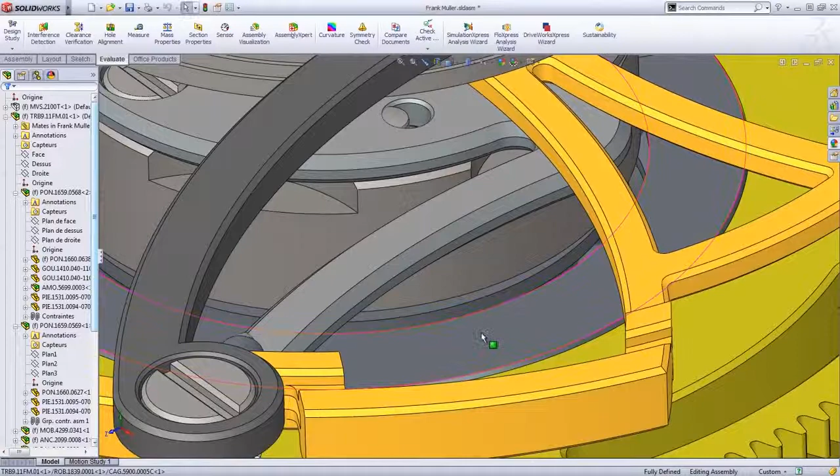From here, the isolate command can be used to focus on the misaligned parts and to then easily modify the problematic components directly within this assembly. The measure tool is also quite useful for checking your design or clarifying an issue. SolidWorks' robust set of tools makes correcting this dimension and repairing this part very easy, as we can rapidly realign the holes without ever leaving the assembly environment.

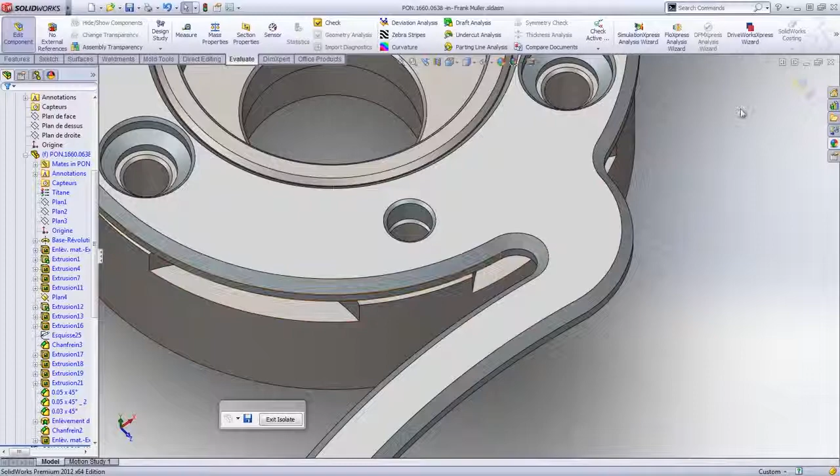Interference detection is another key capability useful towards achieving proper fit and function of a design. This analysis can be performed on the entire movement or only on this subset. With one of the fastest solvers in the industry, SolidWorks enables designers to quickly identify issues, even when all of the parts of this timepiece's mechanism are intricately related.

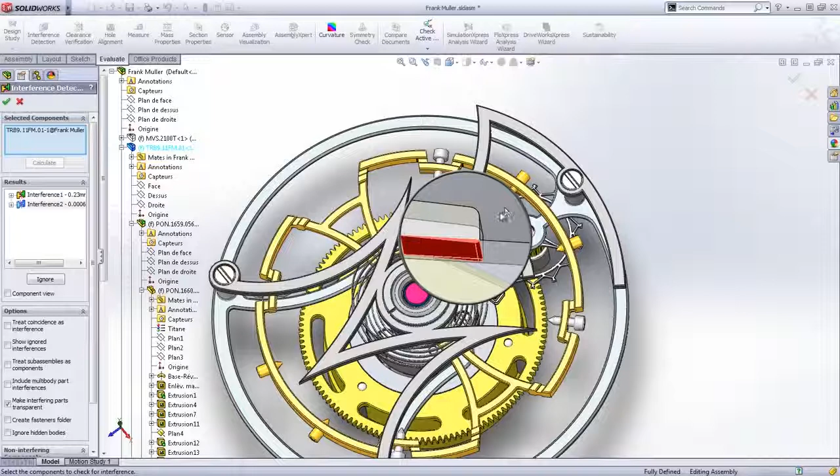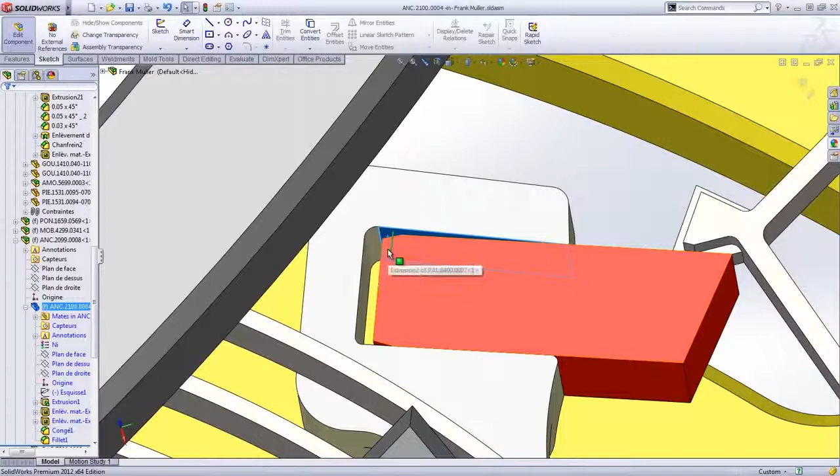When selected, the interfering volumes are highlighted on the screen, allowing you to see exactly where the problems lie. It is often a question of identifying and adjusting the offending parts. Armed with this knowledge, the first interference can be immediately fixed by editing the part in the context of the assembly and using SolidWorks' Instant 3D to modify the geometry. Pulling the handle will literally extend or shrink this feature on the fly.

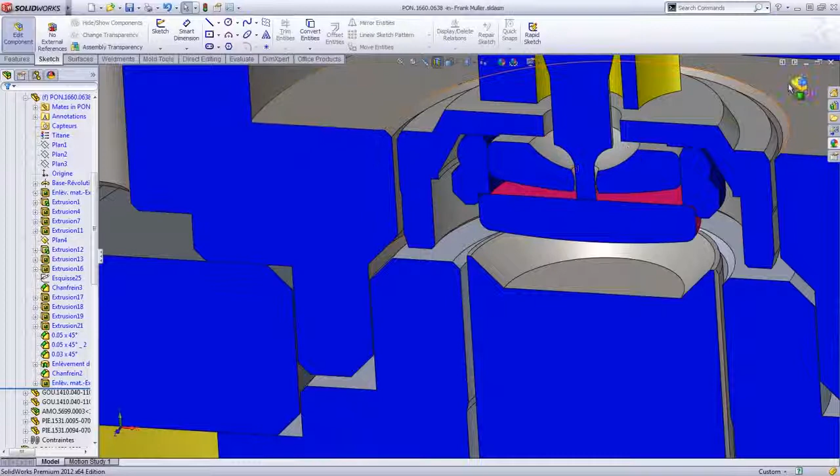Then, sectioning the model in half is required in order to have a visual cue on the second interference problem. In this case, we can clearly see that these two parts are clashing, and using the same technique, we can adjust the part to rectify the situation. By simply dragging the geometry, design changes are completed with speed. Also, the on-screen ruler allows you, if necessary, to precisely measure modifications without having to manually type in any dimensions.

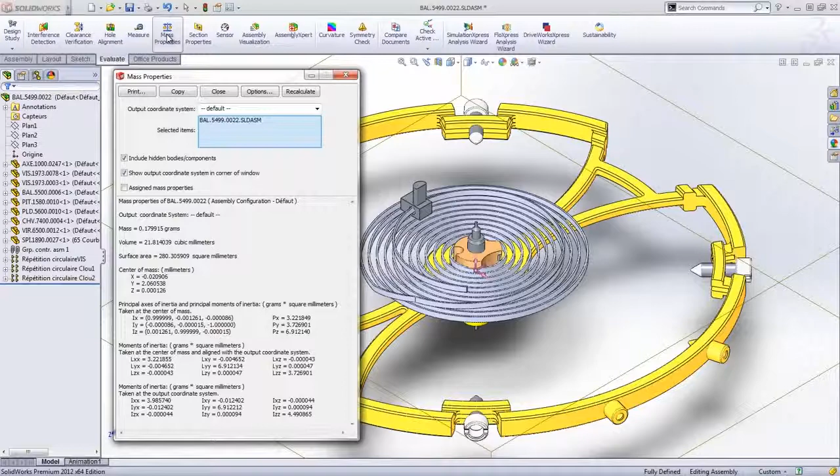Let's take a closer look at the watch's tourbillon. This feature improves the watch's accuracy by countering the effects of gravity on some of the most delicate parts of the escapement, most notably a pallet fork and balance wheel with a hairspring attached. SolidWorks Mass Properties lets you visualize the center of mass to ensure an equal distribution of weight. And like most of the properties, it can be tracked and monitored by a sensor which will alert you automatically when the value deviates from a specified limit.

SolidWorks clearance verification is also important to ensure proper function of the mechanism. This tool allows you to perform a rapid inspection to determine the minimum distance between the tourbillon and the other components of the movement. As usual, the failed clearances are listed under Results, and once selected, a dimension appears in the graphics area indicating the minimum distance between the selected components.

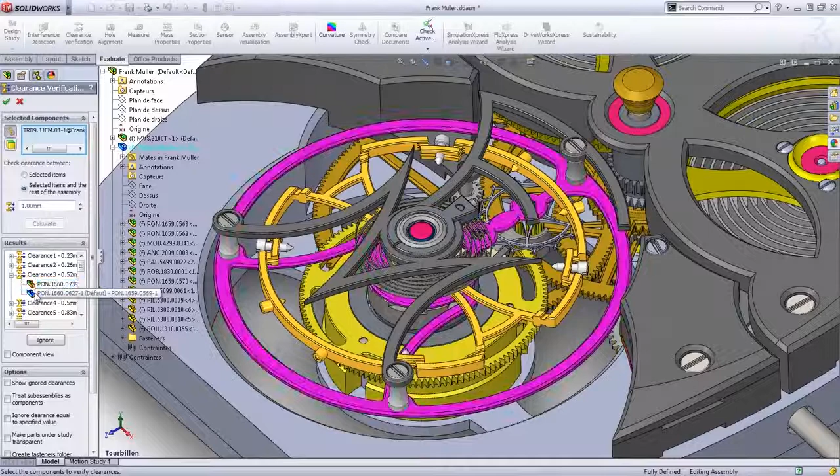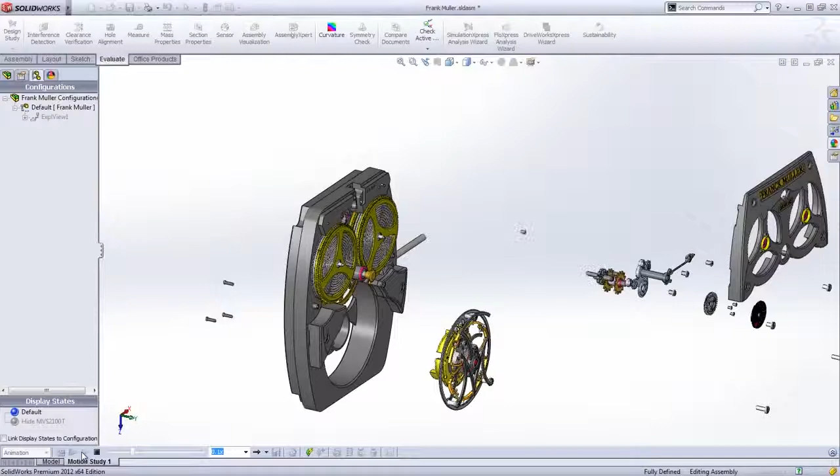Finally, SolidWorks Exploded Views provides designers with a simple yet powerful way to show how all of the individual parts are put together and how the movement is assembled. With so many components packed into a small design, this feature, along with all the other evaluation tools integrated within SolidWorks, is invaluable towards overcoming the increasingly difficult challenges that are intrinsic to timepiece development. In fact, designing better products has never been so simple with SolidWorks.